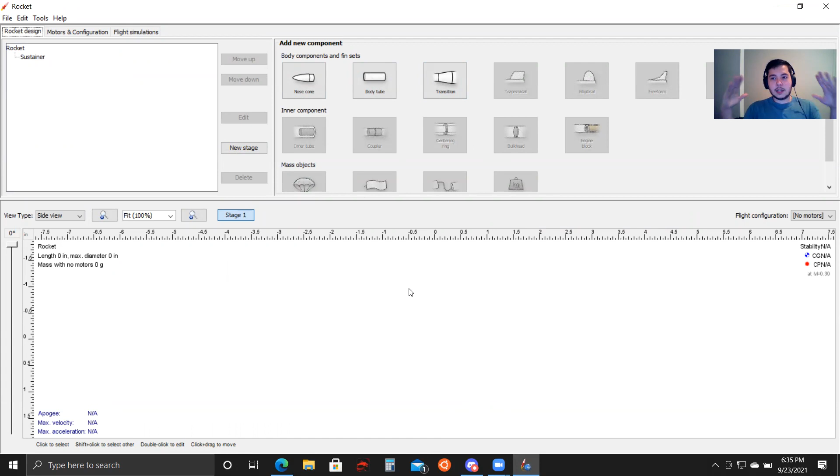So let's get started. First, we start with this blank form here. Just a little synopsis of what's going on here. This top part here, these are all the parts that you can put in. And so you click and it'll put the part down here. This will show you your rocket, kind of like a side view of your rocket. Up here, it says rocket, that's just the name.

And let me see where stability is. Okay, one thing that I want to point out to you guys. Yeah, I'm gonna have to move myself around a lot. Let's do this for now. Okay, so the way that this works is that down here, you'll see a few things. First, on the bottom left, apogee, super important.

The apogee is the highest altitude that your rocket reaches during flight. We're gonna give you guys a particular apogee that you're going to aim for. This is for all challenges from altitude, payload, and lander. So this is how you'll know kind of how far your rocket's going to go.

Of course, in the real world, the atmosphere has various pressures. There could be wind and all these different factors that can ultimately lead your rocket to not really reaching that exact apogee. But this is a pretty good estimation of where your rocket's going to end up.

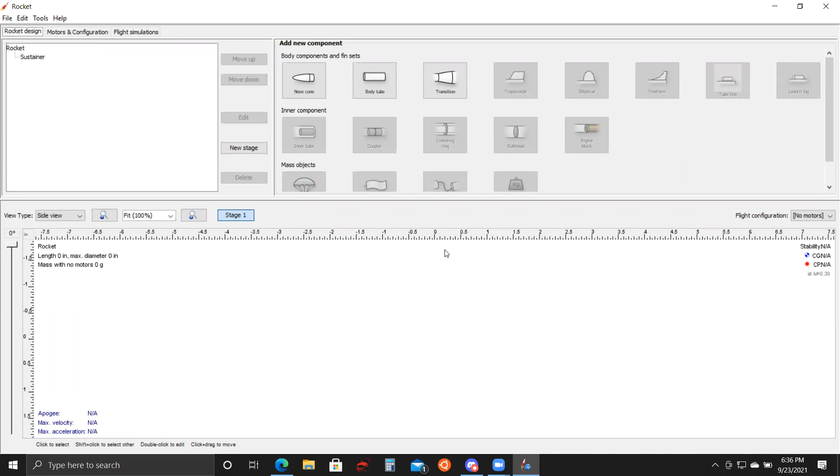The next thing that is super important is this stability to the top right. Last week, we were talking about rocket stability. I was explaining to you guys how it works. And I told you that we like a stability between 2.0 to 2.5 caliber.

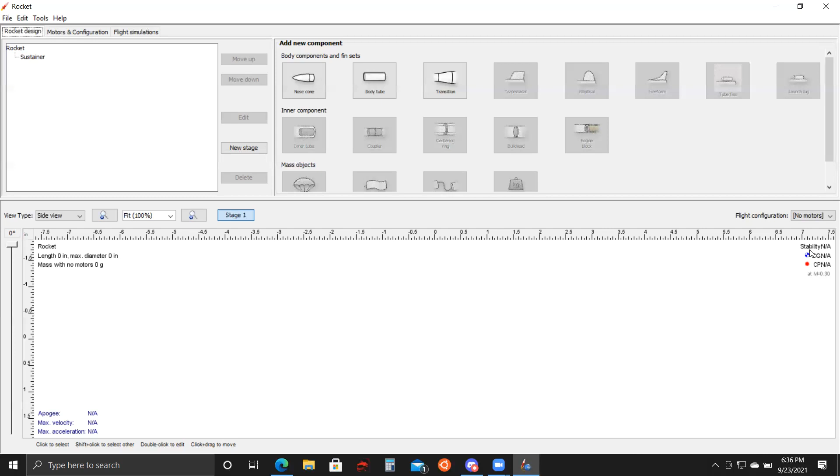This is what I'm talking about from last week. You want the number on the top right here to be from 2 to 2.5. If it is not, I'll show you guys here how to make the adjustments to make it more stable. Other than that, this is the really basic stuff that you need to know. So we can just get started.

Oops, let me show my face again.

Okay, so first we're going to put on the nose cone. So the way that it works, you look here, nose cone, put it down. So whenever you put a part on, it'll put it on the bottom and you'll see this window right up here. You guys see this window, right? This nose cone configuration, component name nose cone.

Just want to make sure that you guys see my whole screen. Yeah. Okay, cool. Chat says yes. Heads up, I'm here. Oh, nice. Hey, Mark. Yeah, no, if you see that I missed anything, Mark, please interject and let me know, hey, you missed something. So you can go from there.

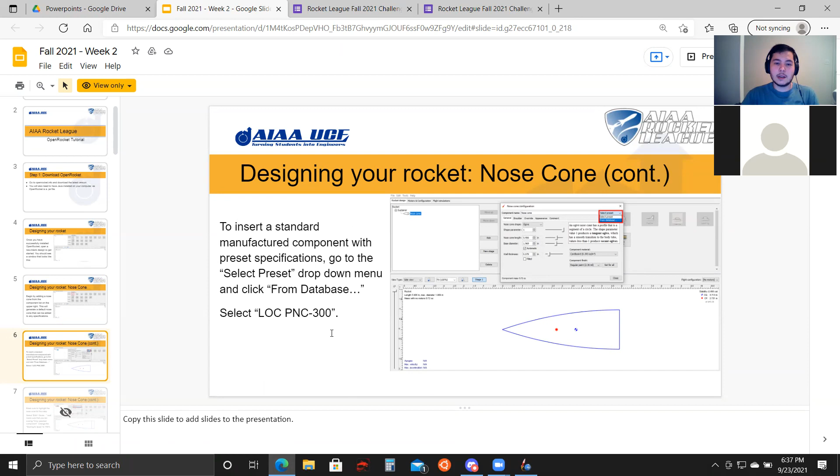All right, so after you put in your nose cone, there's going to be a bunch of different options. What's likely going to happen is you guys are going to be given a preset nose cone. The slides say to do an LOC PNC-300 from the database. So the way that you access all database parts is you look on the top right, select preset, click down from database. You're going to have all these options. What you can do is, it's this very tiny box that says filter by text.

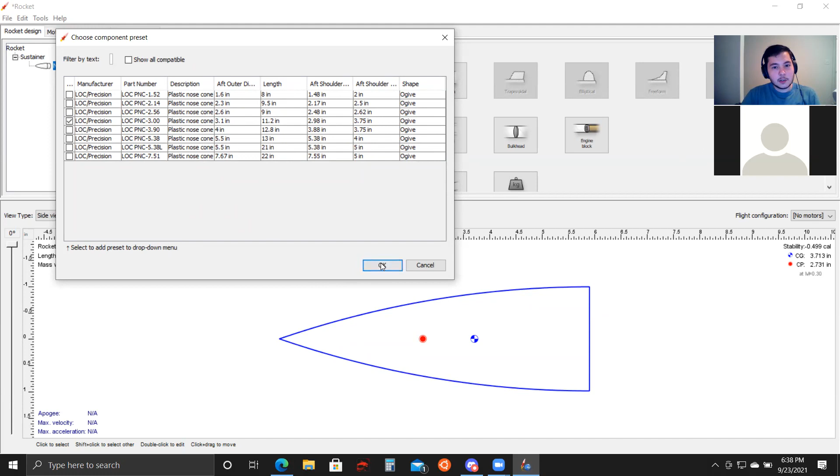If you click and you type LOC, you see how you don't see it up here, but if you click on this little box and you start typing, it'll show everything here. So we're looking for the LOC PNC-300, which should be 3.00, but still, it is this. So you hit the little checkbox, hit OK, and then it does not work. Oh, okay, there. Sorry about that. It puts it here. You click. Hey, look at that. Your nose cone is now put to that preset.

Once we give out the bill of materials, you guys will know exactly if this is the nose cone or if there's a different one you have to select. But I think the LOC PNC 3.00 is the one that we're using. Just a little thing, sometimes teams can design their own nose cones. If you were to 3D print it, you can basically make your own shape, whatever you want. The way that you would do that is if I go select preset again, it's already done that. Let me just quickly delete this nose cone and show you the different options. So here's how you make your own little nose cone.

First, you can do shape. There's a bunch of different ones that you can play around with, like conical is this little triangle shape. Ogive is kind of curved based on a particular formula, ellipsoid, like that. And you can play around with all these. You can play around with the length. For the base diameter, you want it to be 3 inches. Might be 3.1 or something. Basically, you want the diameter of the nose cone here to be the outer diameter of the body tube, just so it sits nice and flush.

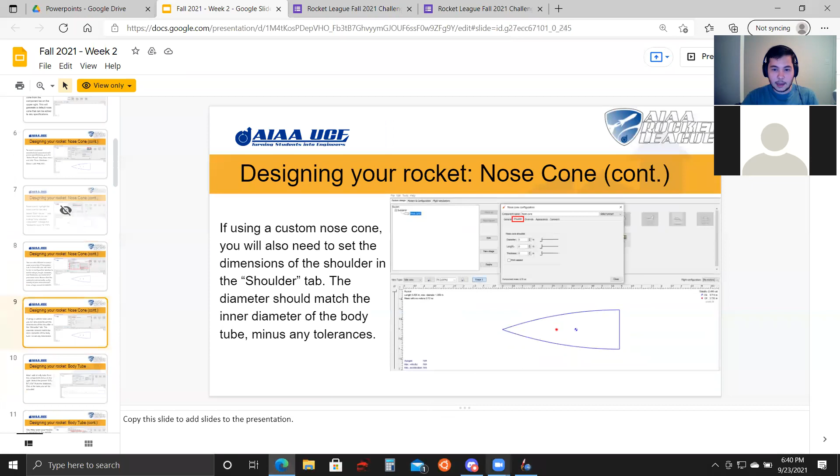Wall thickness, I forget what we set that to. Well, it will be based on the LOC PNC. So wall thickness 0.125 inches. Yeah, so you're going to want to do something like that. Actually, this is quite nice to work off. So just back to this. I'm really sorry for the mess. Nose cone length, play with it. Shape, play with it. Wall thickness 0.125.

Cool. For component material, put plastic, I believe. It should be polystyrene. Oh, polystyrene, my bad. There you go, polystyrene. Basically, the way that you would do your nose cones custom is you would 3D print them. If you go to the TI lab, they have 3D printers, or if you know someone with a 3D printer, you can 3D print your nose cone. I've done it before for my level 1 rocket, and it worked. So you just make a SolidWorks mock-up of your nose cone, and then 3D print it. Another thing that you have to keep in mind is you need to click this shoulder.

What the shoulder of the nose cone is: imagine you have a nose cone, and then under the bottom there's another little piece that fits into the rocket. That's how it secures the nose cone into the rocket. So if we add a nose cone shoulder, let's see here. In essence, you need the diameter to match the inner diameter of the body tube. So we put 3 inches.

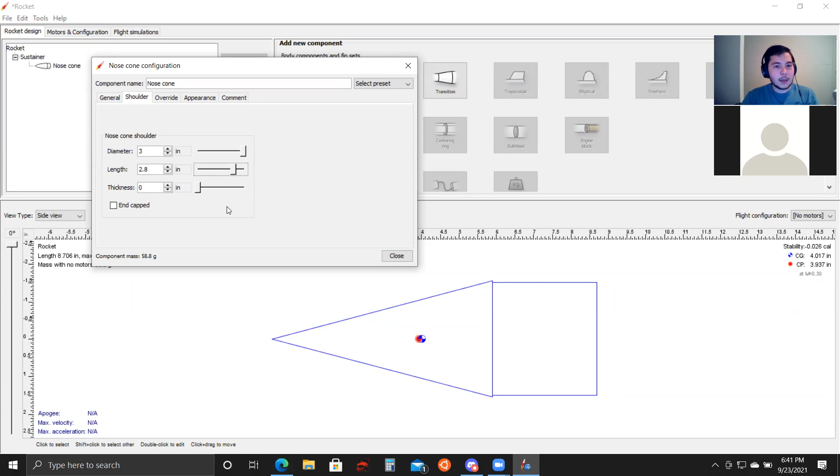We could put a length. Ooh, let's see what a good length looks like. Uh-oh, looks like my nose cone's base diameter is pretty small. There we go. It's going to look something like that. So you could put a length here. I forget what I put my length to. We'll check with the LOC preset later.

And then thickness, you should add the 0.125 as well, just to make sure it has the thickness. And you can kind of get the gist of how you make the nose cone. For the LOC, it is 3.75 inches, so that's about the length of the shoulder that you want. But that's all stuff if you're making your nose cone. If you're not making a nose cone and just using one of ours, just use the preset, and it's a lot easier to do this.

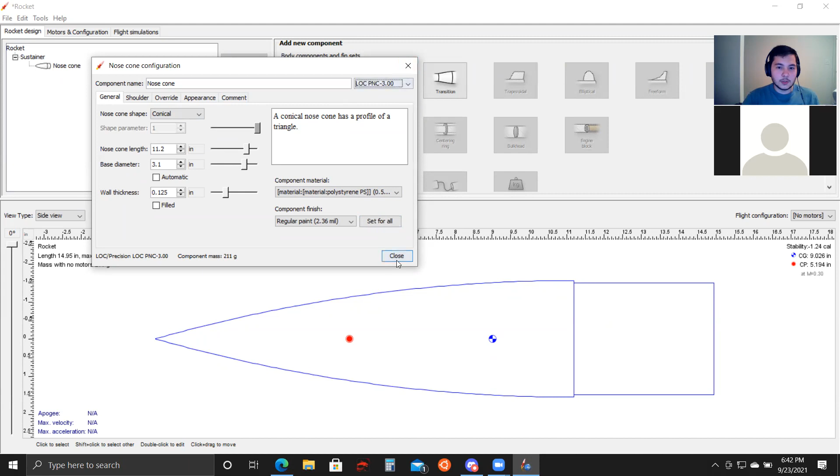I think that's all the parts that I need to talk about for nose cones. Does anyone have questions about nose cones before I move on to body tubes? Cool, I'll move on. All right, so we have a nose cone, but that is only one little piece of the rocket. Now we put in a body tube. Where is it? It's right here. Pow, you add a body tube.

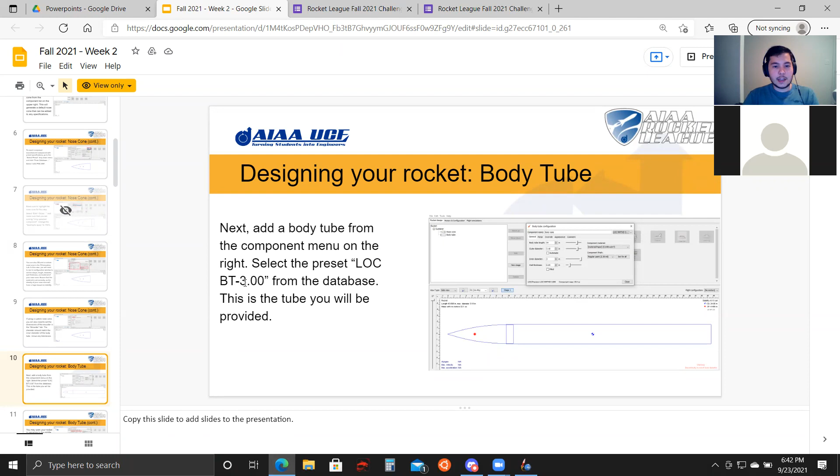For the body tube, you're going to want to use the LOC BT-3.00 from the database. This you want from the database for sure, because those are the body tubes that we give you. So you go LOC, precision BT, this one. Okay, go back, hit it. There you go. Let me put my stuff away so we can see the whole body tube. So now the body tube is like this. This is one long piece.

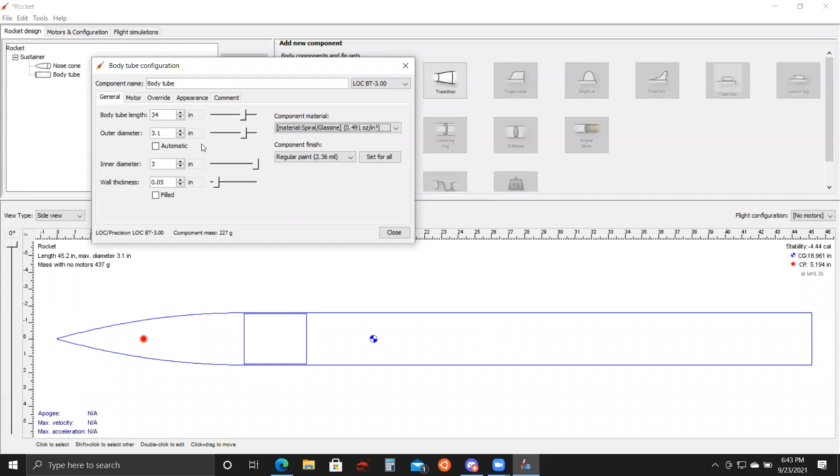If you are doing the lander challenge, leave your body tube like this. You will have just one big solid piece. If you're doing altitude or payload, not lander, you're going to be splitting your body tube in half down the middle. The way that you do that is you take this and change it to half, which is 17 inches, I believe, 34 divided by 2.

Then you're going to close this out, and you can look at the components that you've actually put into your rocket. Hit body tube, Control C, click out, Control V, and you can see that you've made 2 little sections for the body tube. So now you have 2 halves of one bigger body tube.

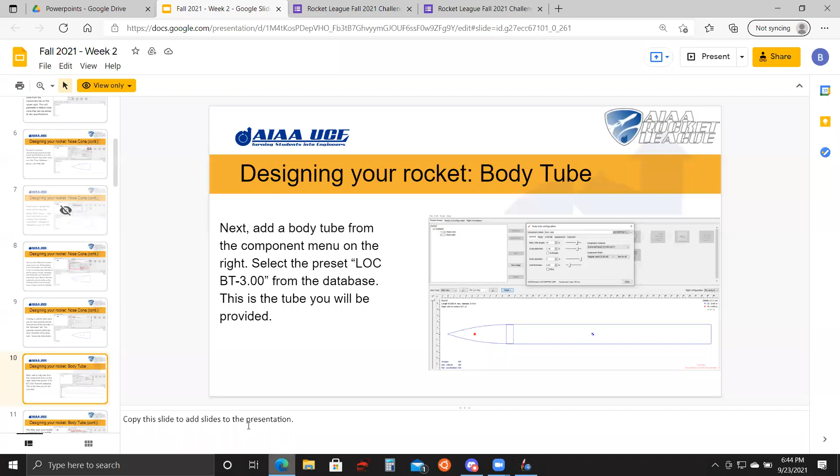When you do this, you're going to have to put something called a coupler. Basically, imagine you have 2 ends of your body tube, but they've got to slide together somehow. So you actually put in a coupler right here. So if we go to the tube coupler, the TC-3.00 preset. So from database, TC-3.0, there you go. It's still the LOC precision.

Click OK. Alrighty, I did this really badly. What I should have done is put it onto the top half of the body tube, but I accidentally put it onto the bottom. If you look here, we have our nose cone. This body tube is the one to the left, and this body tube is the one to the right. So if I click and drag this up, I can put it into that body tube instead. And its length appears to be quite short.

You should select it from your select preset first. Oh, you are right. Okay. There we go. That's a lot better. Thank you, Mark. See, that's why I need people with me.

Okay, so the preset is there. So now we have this long body tube. What you're going to want to do is, you see this plus here? You're going to want to drag it around. You see how it moves the component around in the body tube? You're going to want it so that half of the coupler, about 3 inches, is in there, probably the best. There.

So you see how half the coupler is on the top of the body tube and the other half is on the bottom. The way that translates to real life, you can kind of imagine you have 2 separate pieces and this smaller coupler, and it's flush with the body tubes. It's like fitted perfectly.

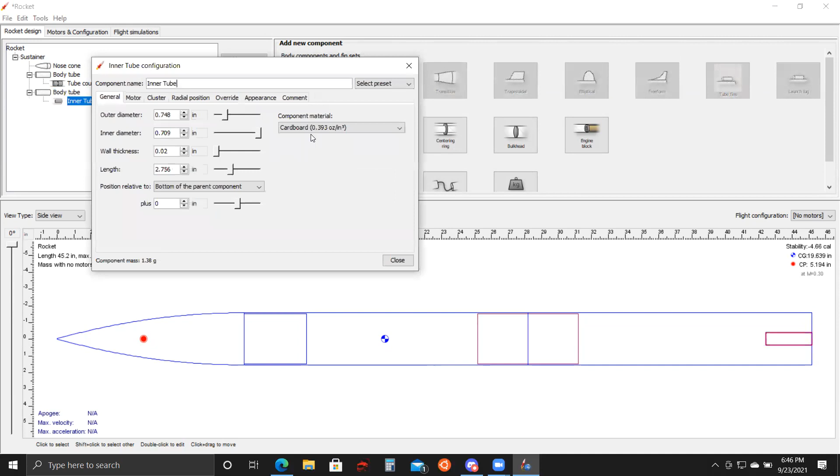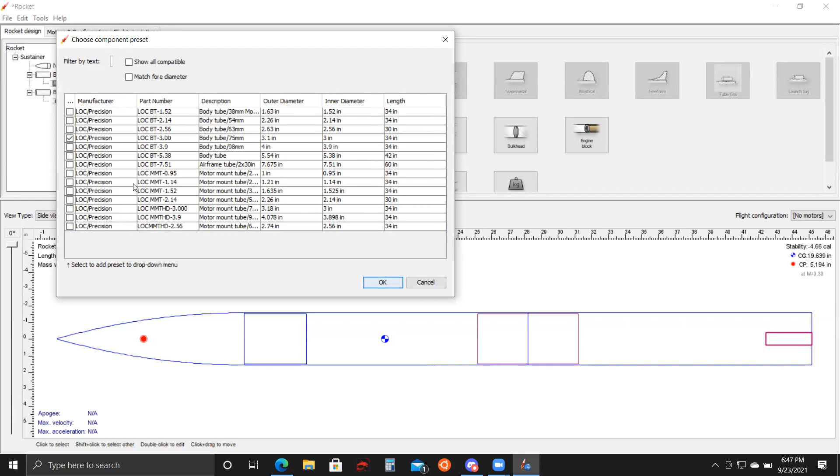Motor tube. This is going to go on the bottom of your rocket here, and this is where the motor goes in. So how does that work? Well, you're going to look for this inner component here for inner tube. You're going to click. The preset is LOC MMT-1.14. So we got preset. I already forgot, LOC MMT. So we click LOC MMT, this one. So we hit OK, select the preset.

That is a long tube. What you're going to do is you're going to take length, and instead of 34, change to 3.5 inches. There you go. That looks better. So just change that length down to 3.5 inches. That's what it shows on the slide. And then you're gonna wanna add a little bit of overhang. So like 0.25. Let me see what the slide says. Oh yeah, there you go, 0.25.

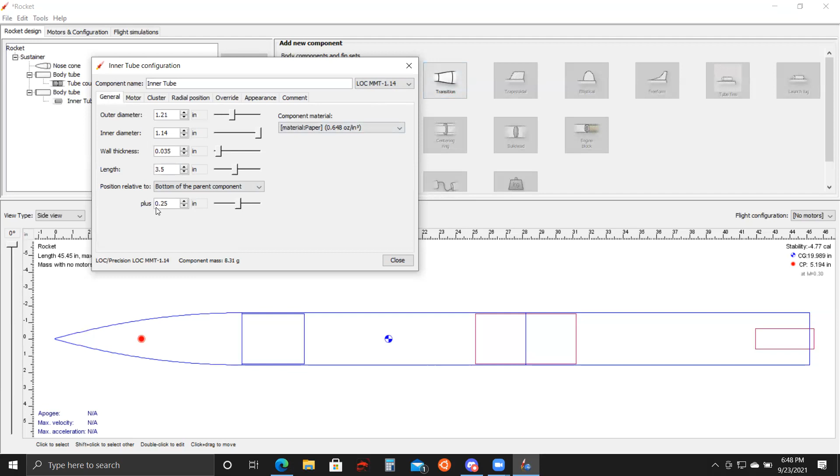The reason why you want to do this is because when you have the motor inside the tube, there's going to be a little part that kind of hangs out. So by doing this, you're going to position the motor tube just a little bit further down to help simulate the actual rocket. So that's it. You just select the preset, change the length to 3.5, give it this little overhang here, and you're done with your motor tube. I trust that was fairly simple.

Now for centering rings. So the centering rings go around the motor tube. The centering rings attach to the outside of the motor tube, but to the inside of the body tube, and keep your motor centered. That's why they're called centering rings. So the way that you do that is you're going to go up here to the inner tube, and then you're going to click here, centering ring.

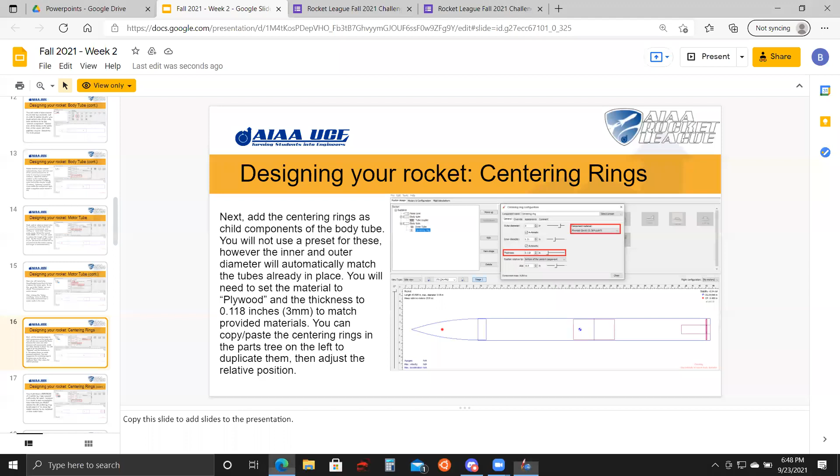And then for the centering ring, let's see here. Is there a preset here? I actually forget. No, it doesn't appear. Okay, so for the material, you're going to want to have plywood. There we go, plywood. The thickness is going to be 1/8 inch. The outer diameter is going to be...

You put your centering ring inside your inner tube. Oh, no wonder it's not working. Put it in the body tube. My bad. There we go. It automatically measures it. Sorry, there's some things that I forget. But anyways, if you put it in the body tube and not in the motor tube, it will automatically measure how big the centering ring has to be to fit inside the rocket. So you can see here, outer diameter is 3, inner diameter is 1.21 inches.

So that's good. You're not going to want just one centering ring. You're going to want multiple to make sure that the motor tube is really secured. So the way that you can do that is we close, Control-C, and you just go Control-V, Control-V.

So now we have 3 centering rings, but they're all on top of each other. That's not really what you want. You're going to want to take some of these centering rings and move them around, right? With this nice slider here, or you can even put specific inputs. You can say that's actually a really nice place for one of the centering rings. And then, oops, not that one. For the second centering ring, you can kind of put it a little bit closer like that.

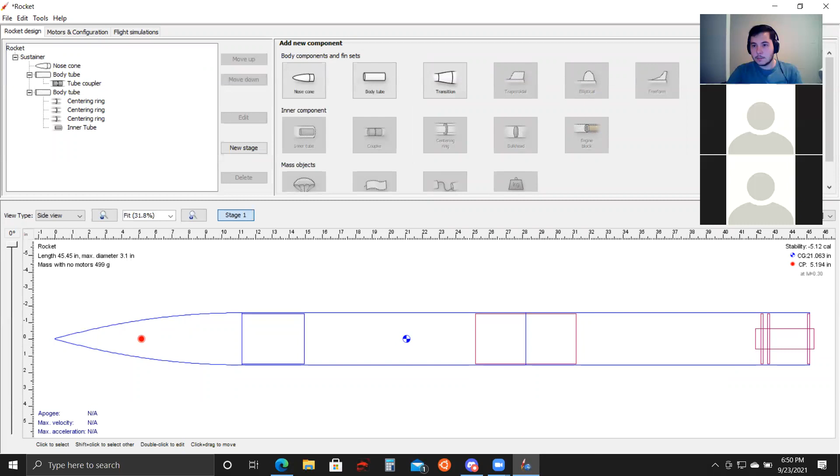Your mic is hot. I'm going to mute you.

Okay, cool. Anyways, you're going to want your centering rings kind of like in this configuration. You can even take this bottom one and add just a little bit. What's the increment? I would honestly say minus 0.4 here. 0.25, but you get the idea. You can kind of play around. You see it, put the centering rings in this sort of configuration. That way the motor tube will be very secure.

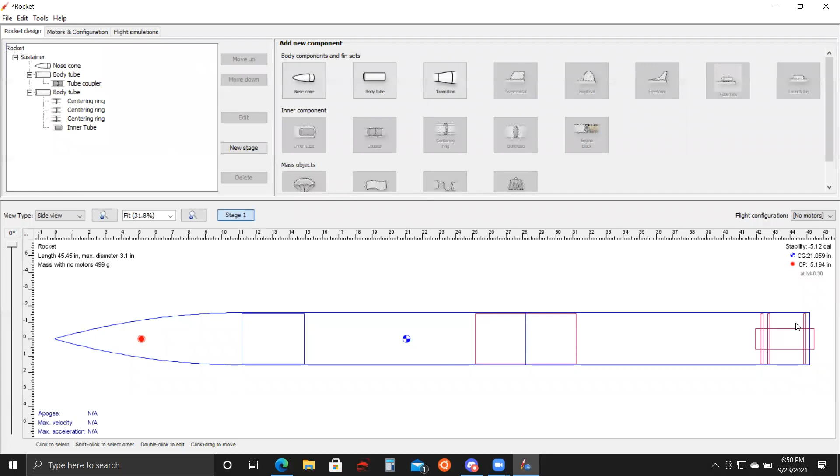But it's very important that you leave a kind of larger gap here, because when we start designing the fins, I'm going to put the fin tabs I was talking about last week in that space. So that's how it's going to attach to the rocket. But that's it for centering rings. You put down 3 or so. Make sure that it automatically fits into the rocket and kind of position them in this sort of shape.

Alrighty, if nobody has questions for the centering rings, I'm going to move on to the next part, which is fins. Hey, look at that. Now that we're talking about fins. Alrighty, so here's how fin design works. This will be a bigger part of how you design your rocket. Everything so far has been very standardized: nose cone a certain way, body tube a certain way, motor tube, centering rings, all of that is already rigid. It's already laid out for you.

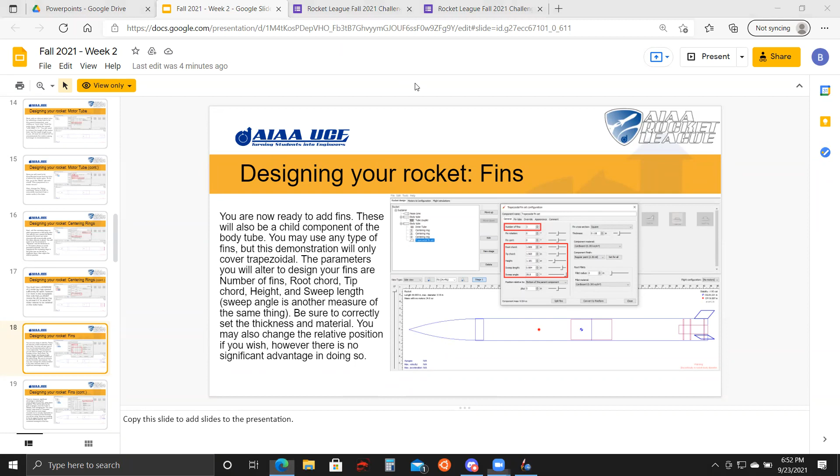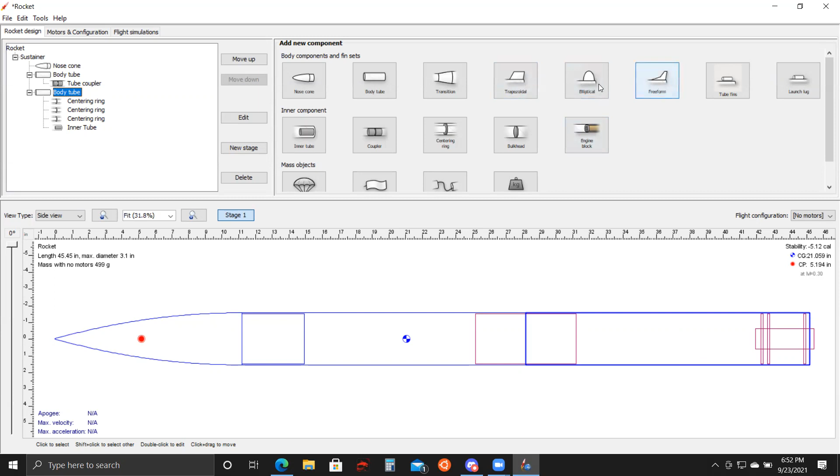But anyways, let's talk about fins. So fins are completely up to you. Last week we kind of talked about fins and how you have to have the root chord longer than the tip chord, and all that stuff. It's gonna apply now. So the way that you put fins in is you're gonna look up here, and you can see 3 different options for fins. Let's go with trapezoidal first, kind of easier. So you click trapezoidal, and you look, oh wow, fins.

So the way that this is going to work is there's a bunch of parameters I'm going to tell you about. Number of fins. This is how many fins your rocket has. You want 3 or 4. Don't go to 2, definitely not 2. Your rocket will not be stable. More than 4 is unnecessary. Also, don't do that. 4 is great for stability. 3 is more efficient, but can be less stable. Not that it's necessarily a horrible thing, but it's a little more stable with 4.

Fin rotation. This doesn't matter. It just kind of rotates it. If you imagine your body tube, fin rotation just kind of rotates it around like this. Don't worry about that. It doesn't help you. Fin cant. Do not touch that. What the fin cant does, I'll show you, is you see how it kind of makes it rotate like this?

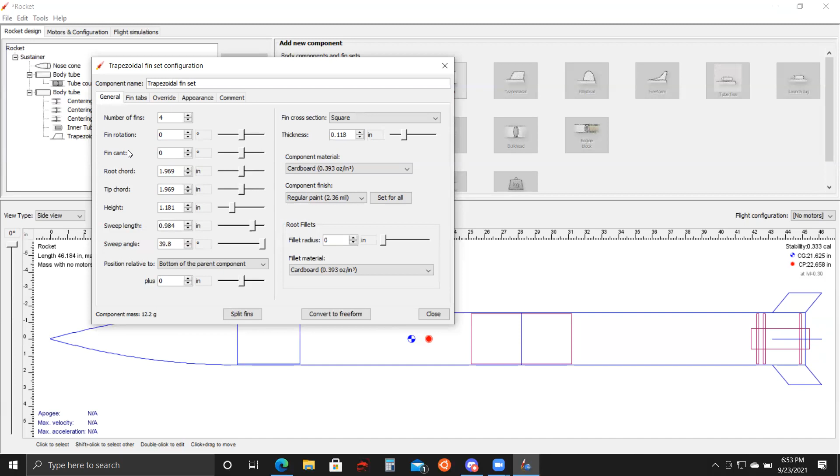What's gonna happen when you cant your fins is your rocket is gonna have these sideways fins, and as it flies, it's just gonna start spinning. Please don't do that. If you cant your fins, you're not flying your rocket. So do not touch fin cant. We like to say you can't cant your fins. So yeah, bad, very bad.

Root chord, very important. This is how big the bottom of your fin is. So you can see as I edit it, look, the bottom of the rocket's fins are increasing. So I would say that you kind of want it to be a little bit bigger. I like the 3.5 inches, something a little bit bigger.

Yeah, so the root chord, you could play around with it. Have it slightly big, though like 3 to 3.5-ish inches is nice. The tip chord, this is gonna edit the top, if you can see there. Make sure that your tip chord is never larger than your root chord, otherwise your rocket will be in a very rough spot. But you can also edit this to your liking.

And one thing that I want to point out, as I'm playing around with these parameters, notice how the stability is changing, right? As I do things, stability is changing. So as you're designing your fins, you're going to notice that, hey, when I do this, my stability is going down, but when I do this, it goes up, okay? And really depending on how you decide to design your fins, your stability is going to start shifting around.

For the fin height, this is how, well, high the fins are. Make sure that they're not too crazy high, otherwise, again, they'll be prone to breaking. And it will not let you know if it's too high or not. And you'll notice, hey, look, my stability is actually at 2.56, so I'm actually a little too stable. Don't worry, that will be ruined once we put the motor in. But just understand that the height will increase your stability because bigger fins means that the center of pressure here, the CP, this little red one, is going to go further down and increase the distance.

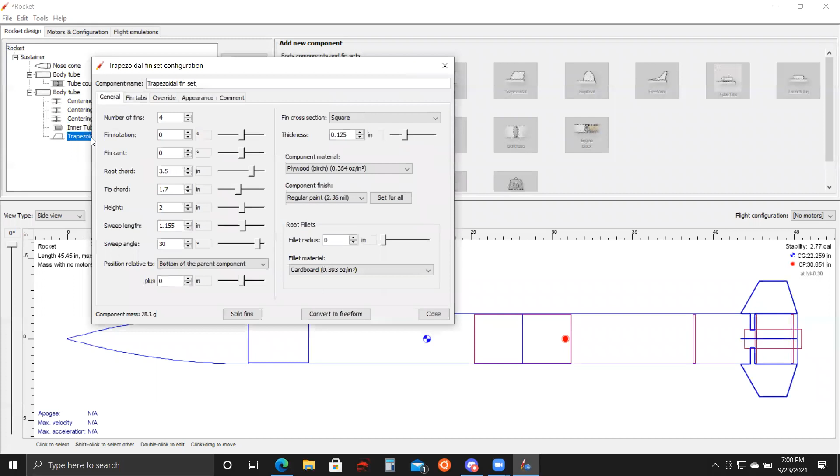You would have to take the centering ring out of the picture. Actually, I wonder if that'll make it work. But yeah, you might have to wrestle with OpenRocket. It's an old program, so you got to give it some time. Anyways, that's the gist of fin tabs, if you can make it work. If not, then as Mark said, outer diameter minus the size of the motor tube should get you there. Does anyone have questions for fins? Because I think that does the trapezoidal fin set quite nicely.

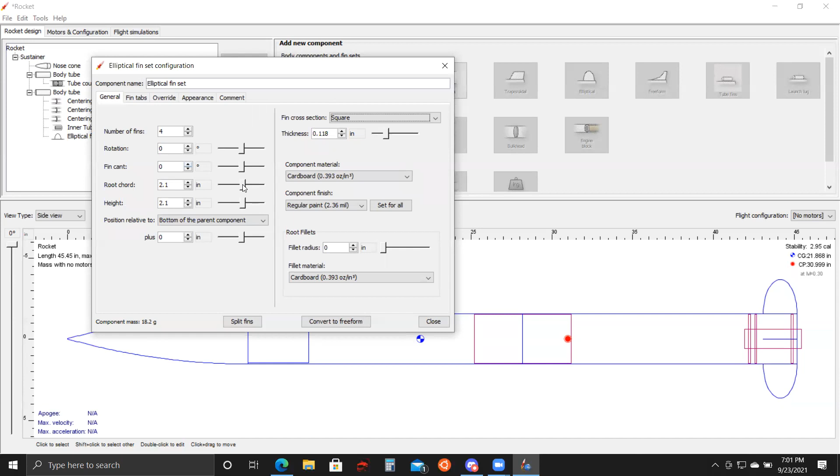If not, then I'll just quickly go over the elliptical fins. There's actually nothing wrong with using elliptical fins. You can see that there's very similar parameters: number of fins, rotation, cant, don't do that, root chord, height, and you can play around with this. And then fin tabs, hold on. Let me make the root chord like that. Fin tabs, calculate automatically. No, okay. Something's wrong with my rocket that OpenRocket doesn't like. Hopefully for you guys, this will work.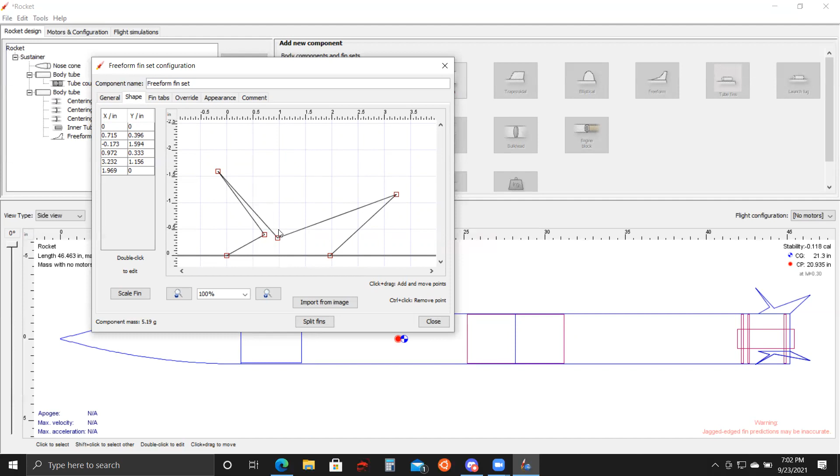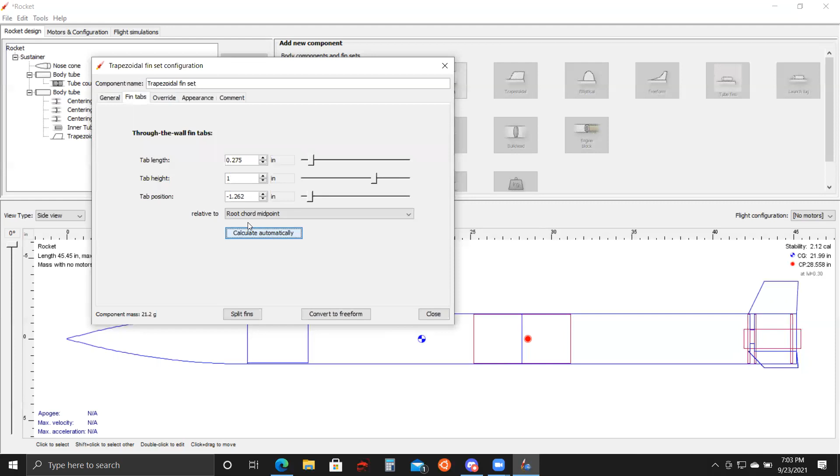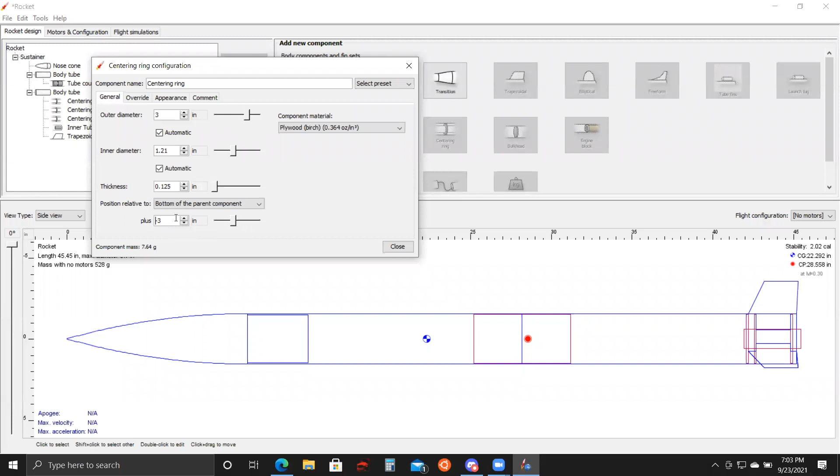So what I'm gonna do now is just really quickly draft up random fins, just to have some stability. 1.9, 2.13. Okay, cool. That looks nice. The fin tabs don't feel like calculating right. Let me just add an inch or so. I do want to have enough of a mass component on the bottom just to have accurate stability. Alrighty, so that should explain most of what you need to know for fins. Keep in mind, you can customize your fins as you'd like, whatever shape comes to your heart, as long as it makes sense to us.

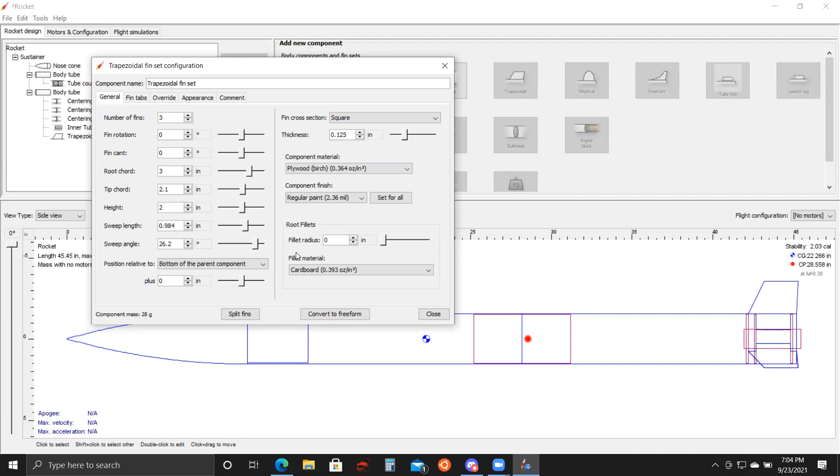So yeah, let me change this out to apply an 1/8 inch. Okay, guys, if there's no questions for fins, then I will move on to the next part of the PowerPoint. Ooh, lots for fins. Do not cant your fins, fin tabs, rail buttons.

Sure, let's do that. So what rail buttons are: you have your rocket, but you need it to be upright on the launch pad. So the way that it works is that there's going to be this long rail, and you're going to be able to put it onto that rail. And the way they put it on is with, well, rail buttons. So the way that you add the rail buttons is you might actually have to hit launch lugs. Yeah, it's the launch lug part, but we will have the specifications for your rail buttons.

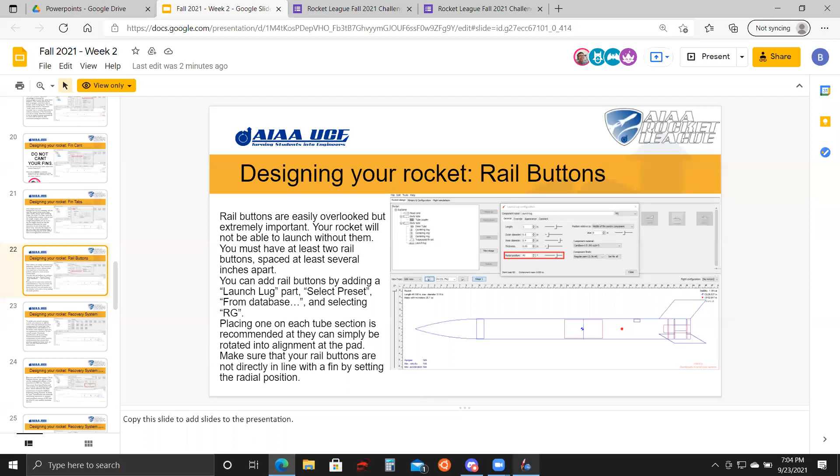RG. Okay, so you go to the database, type in RG. Hey, look at that, giant leap. Hit OK. Then you go to the preset. Nice. The component should not be cardboard. Yeah, Mark. It should be something different. Polycarbonate. Just use a random plastic like polystyrene. Polystyrene, sure. Yeah, we'll have a very detailed bill of materials later. This is just sort of a rough overview of how to do OpenRocket.

Menus you close, and we're going to want 2 launch lugs. One is going to be on the top half of the rocket, and we're going to have the launch lug length. Radial position? No, I don't really need that. Oh, there it is. 0 degrees. You're going to want this kind of higher up on the rocket. And you're going to take this launch lug, copy it, and then paste it into this body tube. You're going to want this one kind of down by your fins. But actually what I'm doing now is bad because my fins are going to be intersecting with the rail buttons.

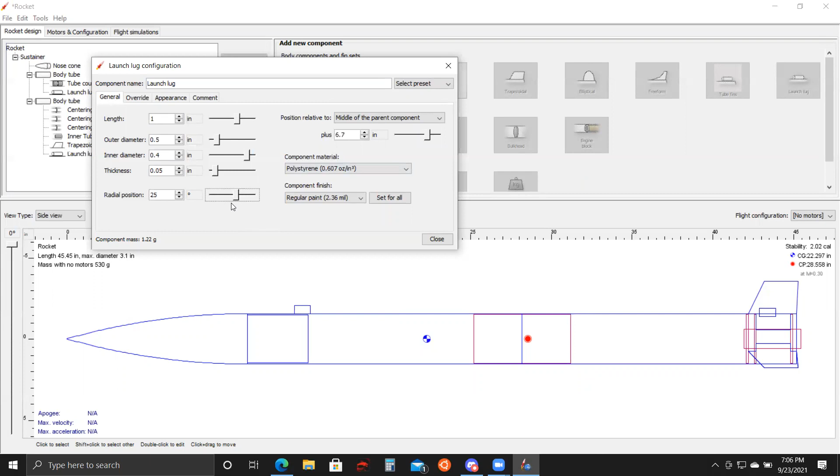So what I want to do is take this radial position and put it with an offset. The way that you can tell if your rail buttons are okay is if you go to view type, you can see a back view. So you can see that I have 2 rail buttons. The top one here is still in line, and I put it to 25-ish. So there you go, 25 degrees. So you can see from the back view, here are my fins, and here are my launch lugs. The fins are no longer intersecting with the launch lugs.

Before at 0 degrees, oops, you see how they're kind of intersecting with each other? That's bad. That is breaking laws of physics. So make sure that you give it some offset compared to the fins, just so it doesn't do that. And I would say actually put more like at least 35 or 40 degrees, just to really make sure that it'll fit on the rail. And we'll do that for the top one too. Also make sure that they're aligned here.

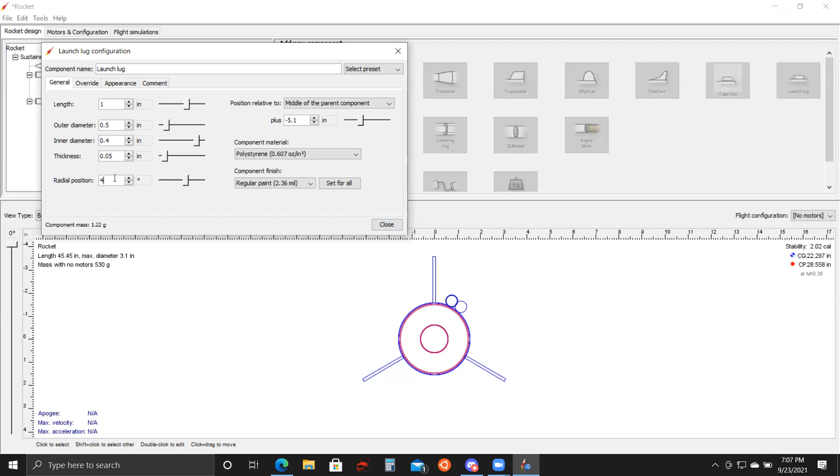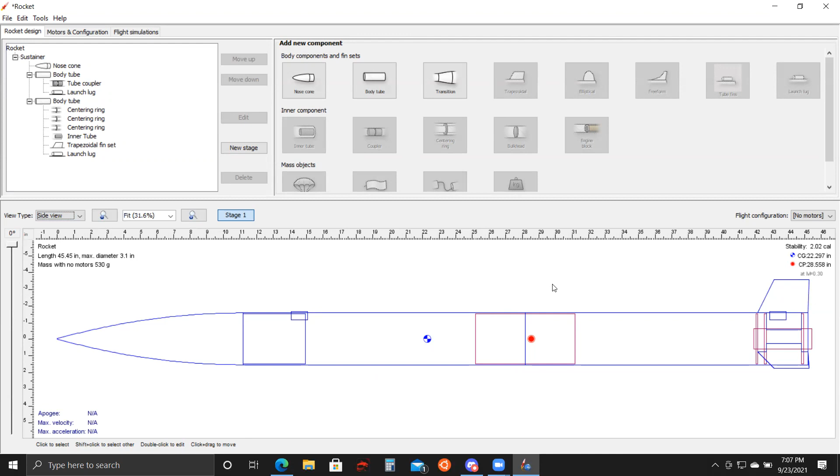Actually, for split body tubes, that being altitude and payload, don't worry about this. Basically, if your launch lugs are misaligned, you can twist the body tube around. So don't worry about lining up. If you're lander and you have a single body tube, make sure that it is aligned. We'll talk more about that during building, but really make sure that it's aligned, because if they are not aligned, they will never be. So yeah, that's it for the rail buttons. This one's a very simple part.

Recovery. Okay, recovery is going to be a little more involved, so we're going to be sitting here for a while. All right, so for the recovery system, you need to add a few things. First, you're going to want to add the shock cord. So if you look here, you can go on this bottom body tube here. If you look here on the mass object, shock cord. Nice. Is there a preset component? Quarter flat elastic. Elastic cord round, elastic cord flat 6 millimeters. That one. Flat 6 mil. Okay, so it's this one here.

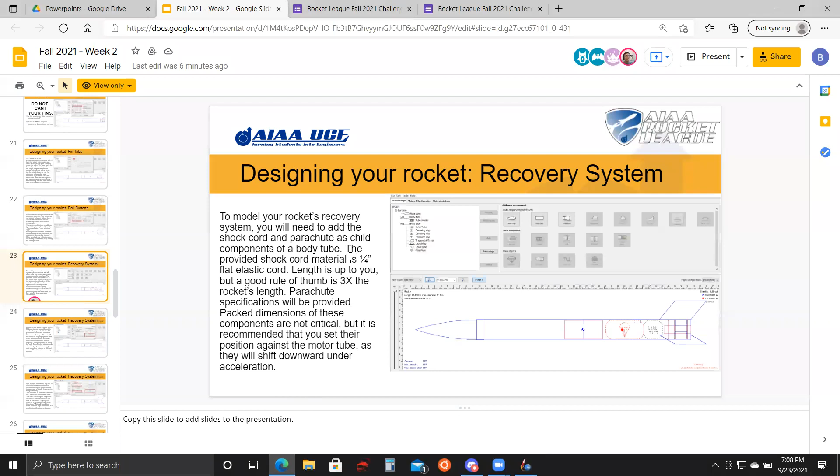And then the packed length, what do we put as the packed length? Well, the shock cord length should be at least 3 times the length of the body tube. So if the body tube is 34 inches, let me just pull out my calculator real quick. 34 times 3 is 102 inches. This is a really good standard for how long your shock cord is going to be, because you need plenty of space so that when the ejection charge goes off, there's enough cord to absorb the force caused by that.

We're gonna give them 84 inches of elastic shock cord. That's right. And then that's fine. It's less than the 3 times the length of the body tube, but that's still good because it usually works. Sounds good. And then for pack length, we're gonna want to increase it, so you can see how the length increases. What do we put down as the pack length?

Oops. Yeah. Well, what's important is that you're gonna want your shock cord, if you notice here, more towards the bottom. Where the actual thing goes isn't as important. Something like 5.5 inches. Pack diameter can be a little bit bigger, as shown in the slide here. Actually, no, it's a little bit smaller. But in essence, what you're doing here is assuming that the majority of the elastic cord is going to be sitting on the bottom of the rocket.

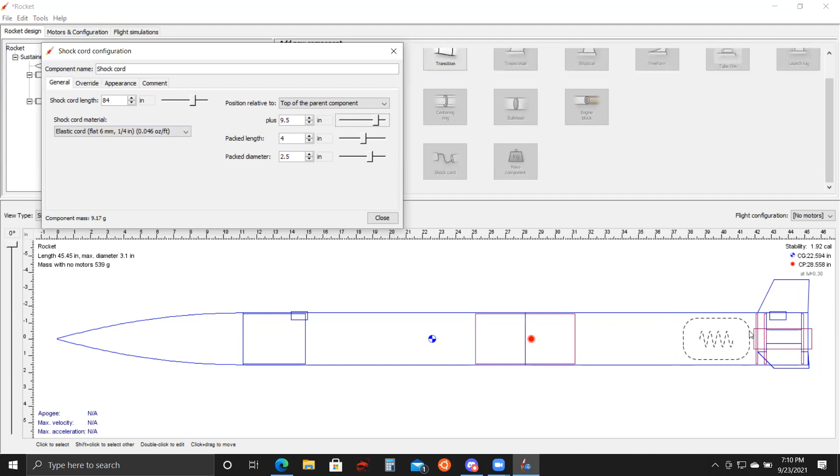And the reason why you do that is because when the rocket is standing upright and being launched, most of the cord is going to be sitting on the bottom, right? If you are altitude or payload, you're going to have a bulkhead, which I'll put in later, which you'll attach your shock cord to. So from here to here, having this 84-inch shock cord and a less than 17-inch space, most of it is staying down here. So it's good to assume that almost all of it is sitting on the bottom. So that is it for the shock cord, or at least I hope it is.

Now let's talk about parachutes. This is going to be a little more involved. So first we're going to explain how we're going to do this. Last week I talked about dual deployment, where first your rocket is going to have the ejection charge go off. It's going to split apart, but the parachute will not be allowed to open because of a chute release. It's going to hold the parachute closed, and then once it falls to 400 to 500 feet-ish, maybe even 300, depending on what we choose, that chute release will open up and allow the parachute to open.

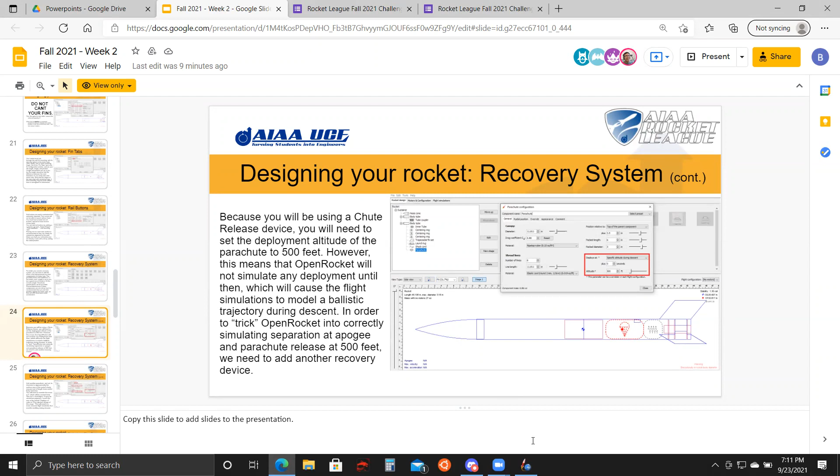But we have to basically trick OpenRocket into believing that the dual deployment happens by having one actual parachute that deploys at 500 feet or so, and then having a fake parachute that opens up earlier in the flight. So I'll explain how that works. So let's put in a parachute, okay? The parachute is down here. If we don't have a preset yet, then we'll give you guys a preset later. But don't worry too much about this. We'll give you the details about the parachute later on.

Let me just make the pack diameter bigger, pack length bigger. Push it down here. You can even have it overlapping with the elastic cord a little bit. This is no big deal. Number of lines more like 8. Line length of 12 is fine. In essence, you're going to have this one parachute. And the super important part that you have to pay attention to is deploys at: not apogee. You're going to have a specific altitude during descent, and let's put it at 400 feet for this simulation.

So we have a parachute. It is real. It's going to deploy at 400 feet. Okay. And depending on what we tell you guys for this, it'll change how the parachute works. But those details will be released as you're designing the rocket.

Someone's mic is on. Lucas, I'm gonna mute you. Okay.

So this is important. Make sure that you do this. Now we're gonna put in the second dummy parachute that I was talking about. The way that you do it: parachute again, but this time diameter 0. You want 0, 0, 0. Actually, you can have a little bit, but you don't want this thing to really exist. And part of that is you're going to go to override mass, 0 grams.

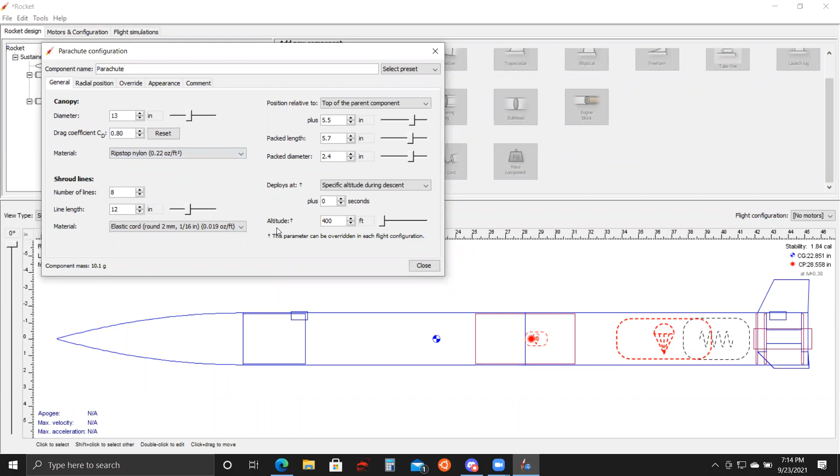Then at 400 feet, as I put here, this parachute is going to go off, and it's the real parachute. And then OpenRocket will go, okay, real parachute going off at 400 feet. Once the rocket is simulated to have gotten there, it opens up, parachute goes, and your rocket lands safely. And I'll show you that once we pull up the simulation part. So that's why we need both dummy parachute and real parachute, and make sure that you put that there to get accurate simulations.

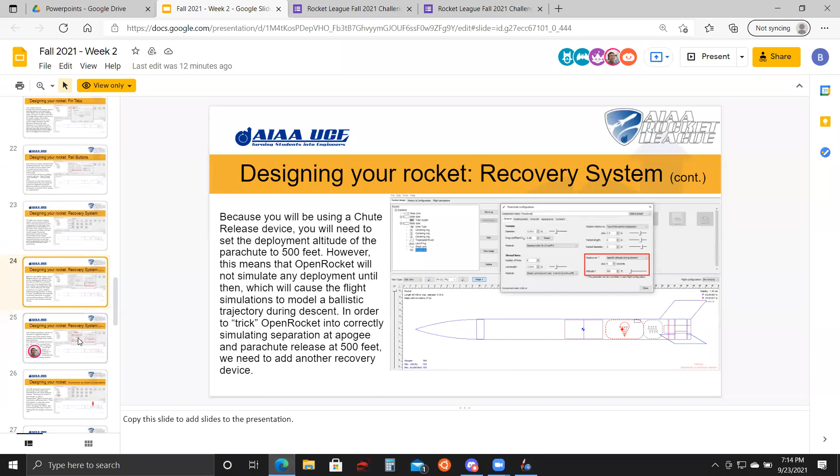Does that make sense? I know that it's weird. I know it's definitely weird, but as long as you follow the slides and you do everything right, you'll be okay.

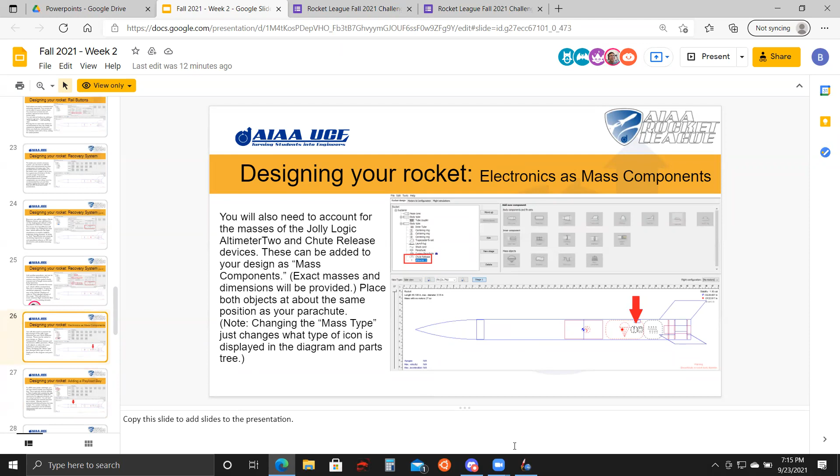Next, design a rocket for electronics as mass components. For electronics, it's pretty simple. All you really need to do is go to mass component, just like this. You can even put mass type altimeter. For the masses, I can't remember them off the top of my head, but it's going to be a very small mass. How massive do you think, Mark? I forget from the bill of materials. I'm sorry, there's so much to remember. In the bill of materials, mass of the altimeter? 0.35 ounces, or in metric, 9.9 grams. Okay, 9.9 grams. All right, so 9.9 grams, and you'll get the bill of materials.

So this will be quite simple. And then just stick this at the bottom, with the shock cord here. Because all these things will be attached to the shock cord and it'll all be sitting on the bottom of the rocket, you can easily assume it'll be sitting on the bottom. And then from there, you don't need to worry about this. The important part is that you have this mass component and that the mass is correct. And if there's any other electronic parts that we include, just make sure that you include them and shove them on the bottom of the rocket. Okay, so that encompasses the main mass components for electronics.

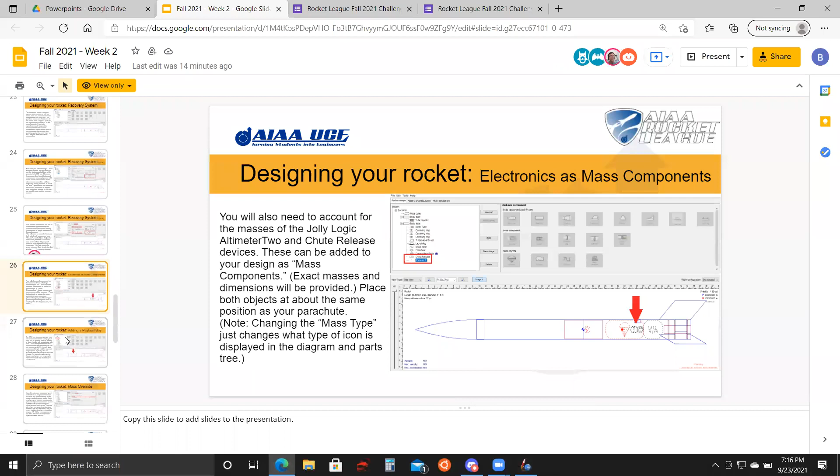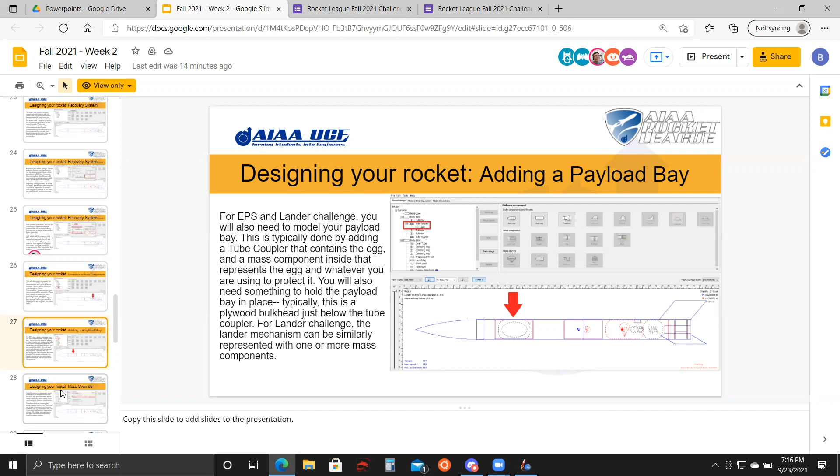So from there, we can move on to payload. If you plan on doing altitude, don't worry about this. If you plan on doing the payload or lander challenge, pay attention, please, because you will need to know this. So when you're doing your payload challenge, you're going to want to do a couple of things. Your payload bay is going to be a coupler with mass inside. So take a coupler, the preset that we gave you, and put it up plus some amount. Let's say here. So you're going to have your coupler, and inside you're going to have the egg.

So what am I going to do? Well, I'm going to go into this tube coupler and add a mass component. And I can even put payload right there. So you're going to want to put the average mass of an egg. Let me Google that real quick. And this is a good assumption to make. What is the average mass of an egg? 50 to 70 grams. Let's do the upper limit of 70 grams.

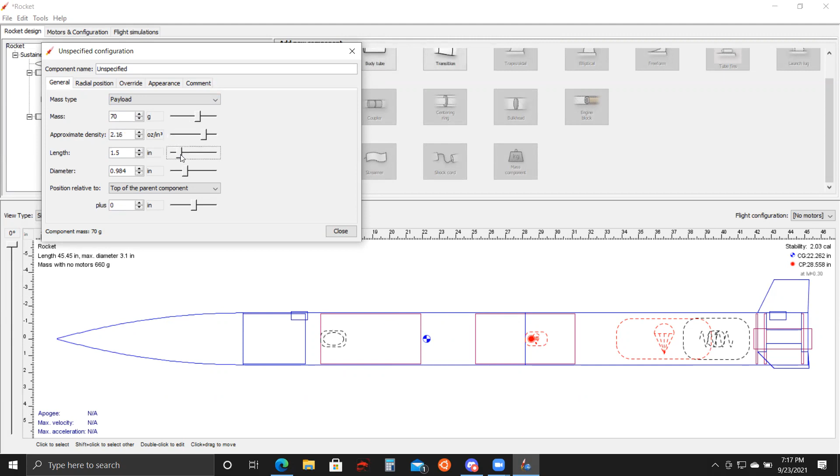And you're going to want the length. If you want, have your length and diameter be the entire payload bay. The reason why is because not only do you have the egg inside, but you're going to have protective material all throughout. It could be packaging peanuts, plastic straws. I don't know. You guys decide how you're going to do your payload bay, however you feel is best. And that's the important part for this.

Now, one thing that I'm surprised hasn't been mentioned is bulkheads, because you're going to surround your payload bay with 2 bulkheads. So I'm just going to explain it to you guys now. How you do bulkheads is this. You press bulkhead, and it's going to automatically calculate here. Make sure that it is plywood, 1/8 inch.

And then you can just kind of fit it ish. It's gonna take some fiddling. Oops. 5.7. No, that was bad. I need 6.1 inches. Kind of like that, 6.2 maybe, but you can see how it kind of fits on like that. Then you could take that bulkhead, Control-C, paste it back in, and then move it to the top.

So you see how you have these 2 bulkheads kind of acting as like caps on your payload bay. 12.3 will work best. There you go. So there you go. That's a payload bay. That's what it looks like.

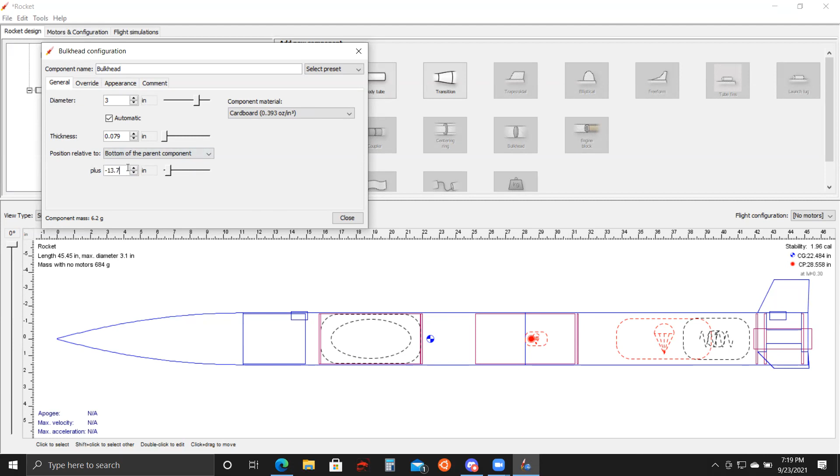And also for the bottom of the rocket, just really quick and on a tangent, you're going to want to put a bulkhead here. You're going to want to stick it kind of like on the bottom of this coupler here, because that's where you will attach your shock cord and all onto this bulkhead. So I need 13.7. Nope. 14 inches. There we go. Something like this. So that's how you put your bulkheads in. And this is a payload bay for the payload challenge.

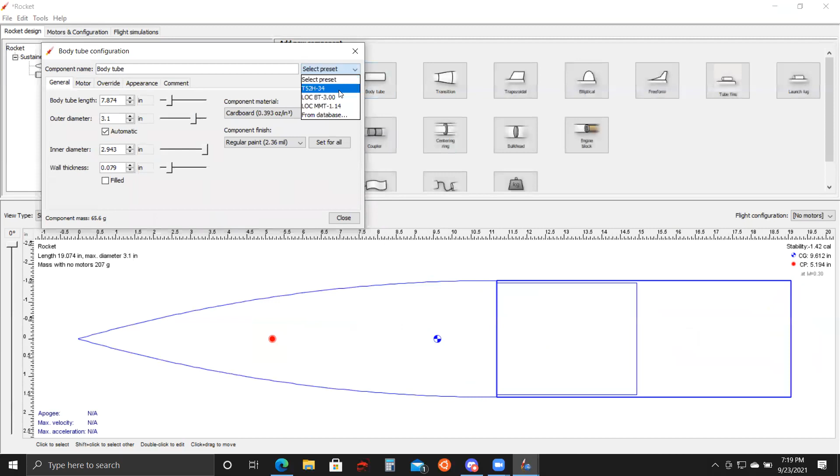Now, if you are a lander, things are going to work kind of differently. Let's go over that now. I'm going to have to make some adjustments. Actually, let me file new. Okay. Let me just really quickly make a super rough draft of this. I'm not going to include the fins and all just because we don't need to. But you'll imagine all the stuff that we have for the previous rocket, so the fins and all, will be there if you're in the lander challenge.

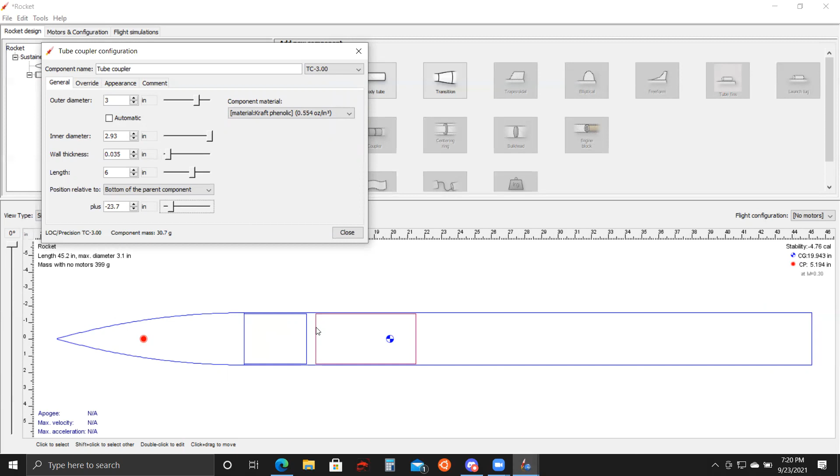What I want to demonstrate is how you're going to be putting your lander inside of your rocket. So what's this going to look like? Well, you're still going to have a coupler as the base. And you're going to put it kind of up here. Make sure that there's enough space, by the way, for both payload and lander. I forgot to mention. Make sure that the shoulder comfortably fits above whatever you're putting in your rocket. If you don't, nothing will fit, and it will be sad. So make sure that your shoulder has plenty of space before you hit this.

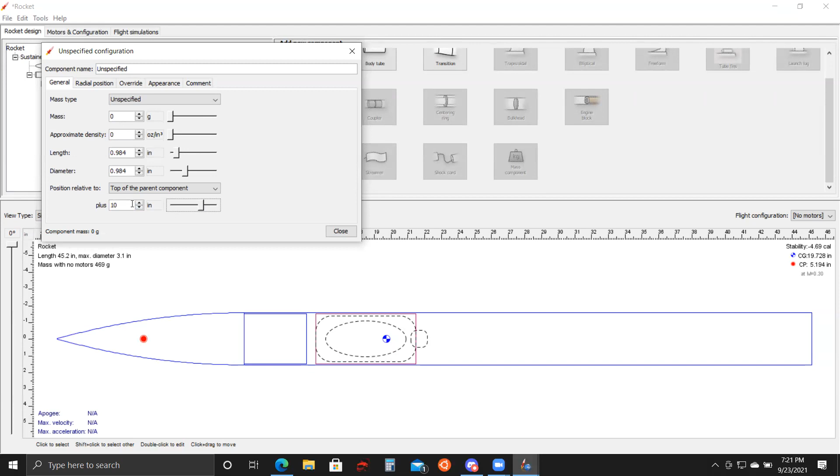And then inside of the tube coupler, you're going to have some mass. Let me make it 70 grams again, because that's what I decided to do. It's a payload. Make it flush. What we're going to do is put some more mass kind of on the bottom. The way that you configure this is going to be kind of weird, but in essence, not only do you have the coupler, but you're going to have legs and stuff on the bottom of your lander. So you're going to want to make sure that you have that mass accounted for, at least somewhat.

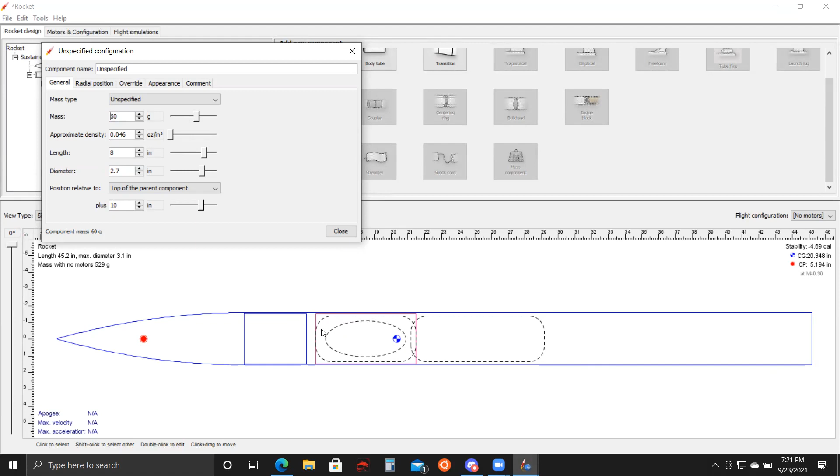Let's say I make a mass component, kind of like this, right? I assume that this area is kind of my legs in a way. And then the mass, if I'm using wood, let's say it's another 60 grams, whatever. So this is going to be basically how big your lander is going to be. So you're going to have your lander inside your rocket, but the ejection charge has to push the lander out of the rocket plus the nose cone. So the way that you're going to,

before I go to that, you need to make sure that your lander stays towards the top of the rocket during flight. Reason being, if you don't have a way to secure the lander in this particular spot up here, although it might be hard to fit in using your hand, once the motor goes off, that force will shove your lander right to the bottom of your rocket. And I've heard horror stories of that happening, and the rocket goes from stable to unstable on launch.

And that is rough. The reason why it goes unstable is if you take that giant mass component and shove it to the bottom of the rocket, suddenly your center of gravity just plummets down. And then you don't have enough stability to have your rocket fly straight. That's from what I talked about last week: if it's imbalanced, you generate a force, then it comes back. The magnitude of the moment depends on the distance and the magnitude of the aerodynamic force down here.

Bring the distance down, the moment comes down, and now your rocket is not stable. So the way that you secure the lander onto a particular position is you actually take a centering ring. And the reason why we want a centering ring instead of a bulkhead is because you want a hole where the gases from the ejection charge can push the lander and nose cone out, but still have that centering ring prevent the lander from going down.

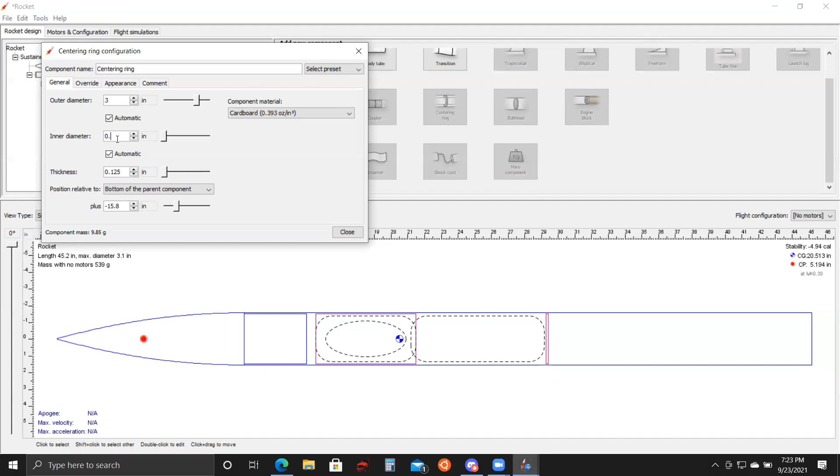And the way that this centering ring will go is you'll have it with a lesser thickness. Then you wouldn't use the normal 0.1 or whatever. Oh, sorry, not the thickness. It's inner diameter. My bad, guys. Inner diameter. Let me check out the back view just to see what this looks like. So you can see that. So the inner diameter, you can see how we want it.

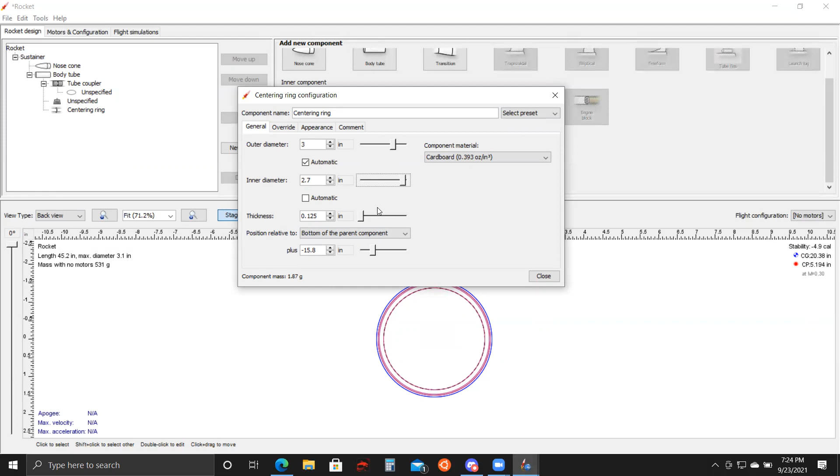So we have this 2.2. So we want it to be somewhere around 2.7. So you have this thin-ish ring, strong enough so that the legs can sit on there and stay there during flight. If you want to be a little safer, 2.6 to 2.7 is good. But you can have your legs sit on that really thin ring without it falling down during flight. This is crucial. If you do not have this, we will tell you, and you will have to change that. Because otherwise, as I said before, your lander is going to shoot straight down the rocket and will become unstable in a heartbeat.

One thing I do want to point out, make sure that you have enough space down here for the lander to fit. My lander team miscalculated this, and this centering ring was way too high up, and we ended up having to basically cut the legs off of our lander. So it's more like a capsule than a lander. So just make sure that you really carefully consider this part.

Another method you could do, if you want to make it simpler, you can make a bulkhead and drill a bunch of holes, just using one of the drills at the TI lab, so that the gases can push through. That's what my team did. It worked. But this is really easy if you do the thin centering ring, because you could just make the CAD model in SolidWorks that we show you next week and just have it laser cut for you without any more effort. So I think that is mostly it for payloads.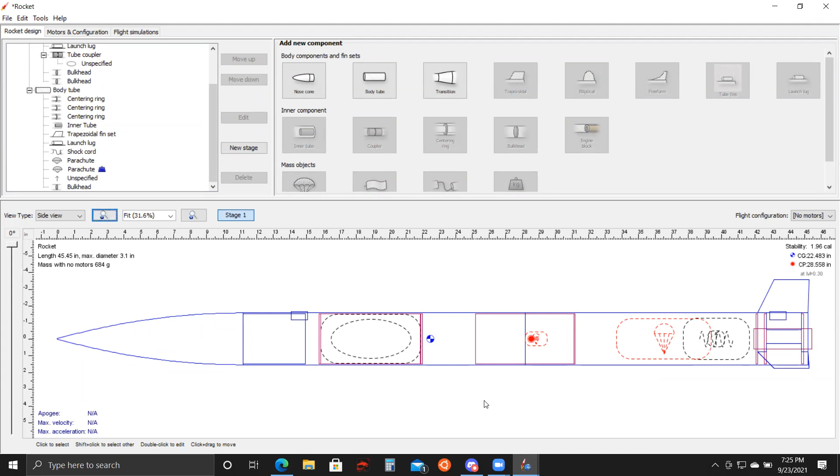Yes, this is it for payloads. And I explained the lander challenge too. Does everything make sense, guys? I know that I just did sort of a huge part of the crash course. Yeah, if there's no questions, I trust that you guys understand. Oh, chat just went off. Yep, cool. All righty, that's confirmation that I could move on.

So now we go for motor configuration. I'm going to close this out. I hope nobody is sentimental towards this rocket because we don't need it anymore. Anyways, we have a motor tube down here, but there's no motor inside. So we need to put a motor in there. Otherwise, our rocket is going to be a bunch of cardboard, plywood, some cord, and parachutes and electronics. But not really a rocket. It's just going to sit and do nothing. The motor is where the fun comes in.

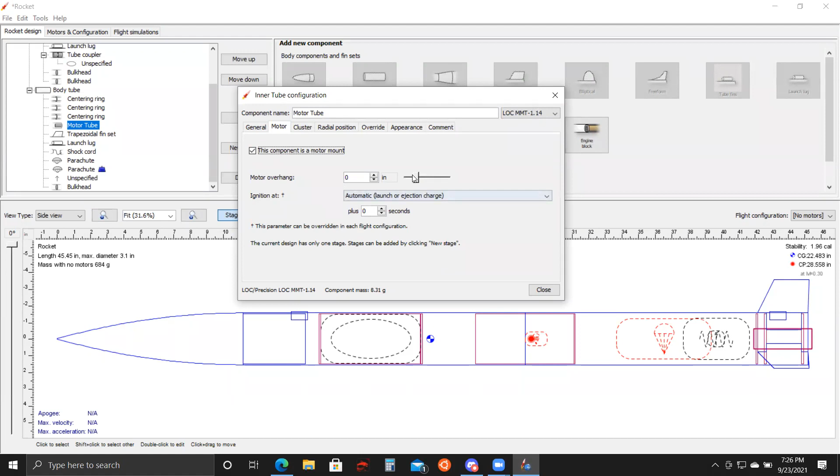And so you're going to want to go ahead, hit the motor tube, inner tube. Actually, I can rename this up here to motor tube, just to make it a little more clear. And you're going to want to go to motor. And this component is a motor mount. Click. Oh, there's motor overhang here. My bad. This could also be another way to include a little bit of motor overhang. But if you do the tube like this, you'll be okay. Anyways, marking this as a motor mount will allow you to put a motor inside of the motor tube.

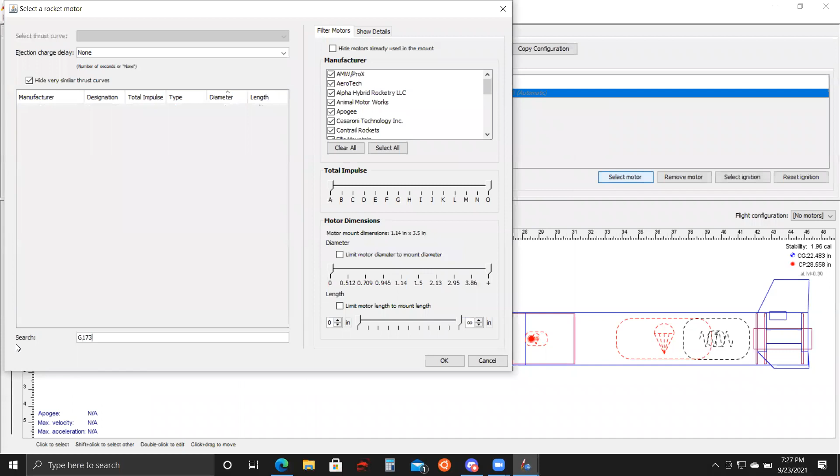So after you click that, you close it and go to motors and configuration. You're going to notice motor tube is something that you can do. So you're going to want to do new configuration. You can see there's no motors. You're going to select a motor. And you can see this huge selection again. You're going to want to look for a G173. Let me see what the slide says. G74. Oh, I'm in the high power category. I'm sorry, guys. G74, Aerotech. Yeah, I think that's the one. Change the ejection charge delay to 9. Oh, you're right. Ejection charge delay. Ooh, what the heck? I cannot see anything.

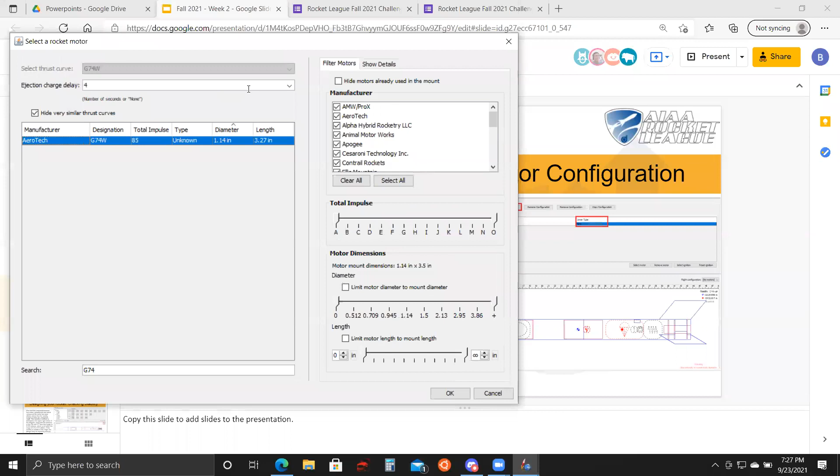Where's the ejection charge part? How did I forget? Oopsie. Oh, thank you. 9 seconds. So that is the ejection charge delay to 9. And I think that's it. I think we're okay. You select this, you press OK, and look, you see this little filling now? Suddenly, the motor is now in the motor tube.

Congratulations, guys. You'll notice that my stability tanked because we have this giant mass component at the bottom of the rocket. But now you have your G74W-9 in the rocket. Checking stability, I'll talk about this. We like it to be between 2.0 and 2.5. If it's more than 2.5, you can say reduce the size of your fins, take off some mass, make your rocket a little more efficient.

But my rocket right now, stability 1.18. Pretty bad, not gonna lie. So last week I talked about how to fix this. One of the ways, change your fins, make them a little bit bigger. So let's say I change the height to, ooh, look at that. If I change the height a little bit more, increase the root chord a bit, oops, the fin tabs automatically calculate. Yeah, there we go. It actually worked this time.

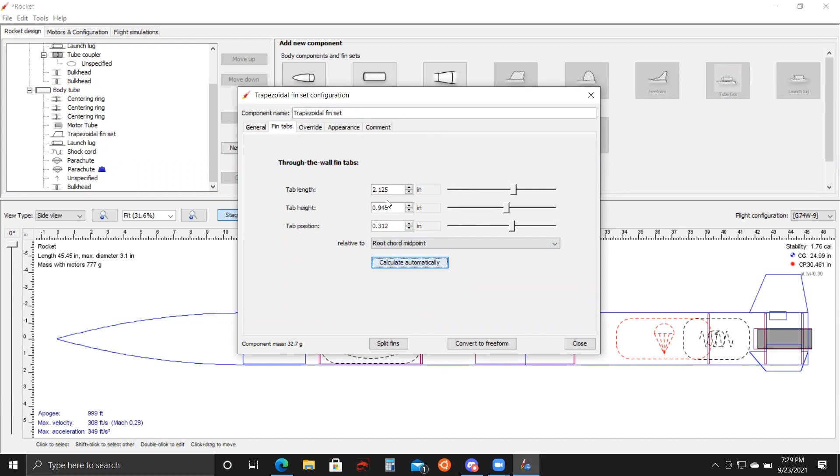The fin tabs actually calculated correctly this time, guys. So I guess, oh no, it didn't calculate correctly, my bad. Hold on, I'm actually curious if I can make it work right. Go fin tabs. I think it worked. Yeah, no, the height is not 1, it's 0.945. Cool. As we've said earlier, Open Rocket is kind of weird sometimes how it likes to function, but you can kind of wrestle with it a little bit and make it work.

But anyways, as you guys can see, I've been increasing the total area of my fins, increase the tip chord a little bit. Let's see how sweep length does. See, look at that. Now these fins look a lot cooler. So you can see that by making my fins bigger, my stability increases because I'm pulling my center of pressure down, and that'll increase the distance between center of gravity and center of pressure. Also, you'll notice I have, oh, what's up?

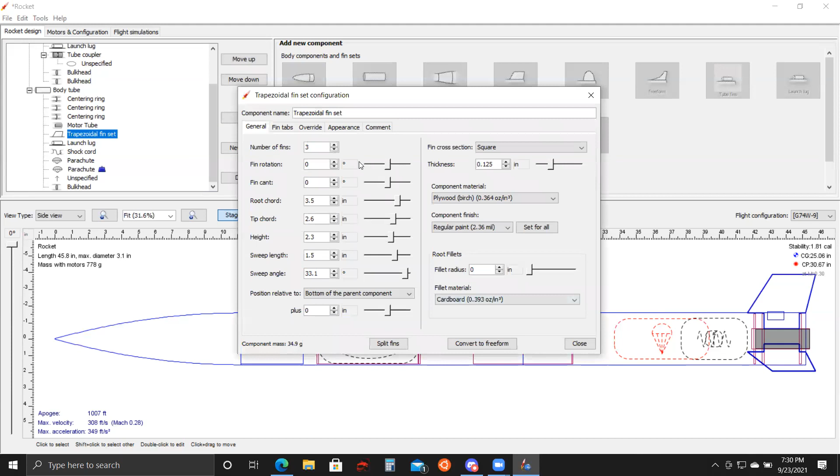Yeah, another way to increase stability is adding more fins. Oh yeah, that's right. I only have 3. So if I go from 3 to 4, 2.46. Look at that. So yeah, adding the extra fin can really greatly increase the stability of a rocket. But I'll leave it at 3 for now because I want to show how to add mass to the nose to increase stability in a second.

I want to emphasize apogee. What I was talking about earlier, look, we can actually see the predicted apogee of my rocket here that I've been designing. It's 1,007 feet. So as you play around with your rocket, change the mass up here and do all this stuff, you'll see your apogee starting to change. So now my stability with my current rocket is 1.81, still a little bit bad. Here's the second way that you can improve it.

If you go to your nose cone, actually click nose cone, you can put a mass component right here. Put it kind of here, and you can sort of play around. If I increase the mass, the stability is increasing. But you'll also notice that my apogee decreases. Of course, if you add more mass to your rocket, it's not going to fly as high. But that's not necessarily a bad thing, because if we set the altitude to 900 or 950 feet, you can increase your stability and kind of pull your apogee down to match our specifications.

Mike, I'm going to mute you.

Alrighty, cool. So that is the second way that you can stabilize your rocket. And when you're doing this in real life, I'll explain this again in building, but basically you're going to put copper BBs or fishing weights on the top and then use epoxy to secure it on the nose cone. I'll give you more details about how to do that, for sure. But this is a very practical and not that hard way to increase the stability of your rocket.

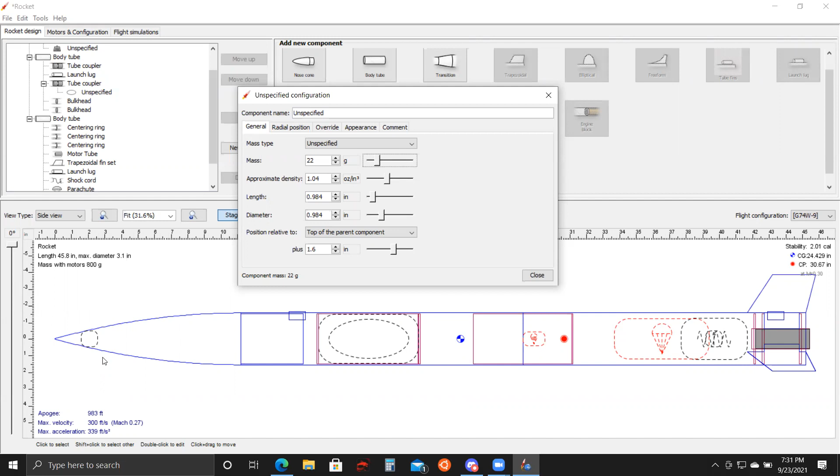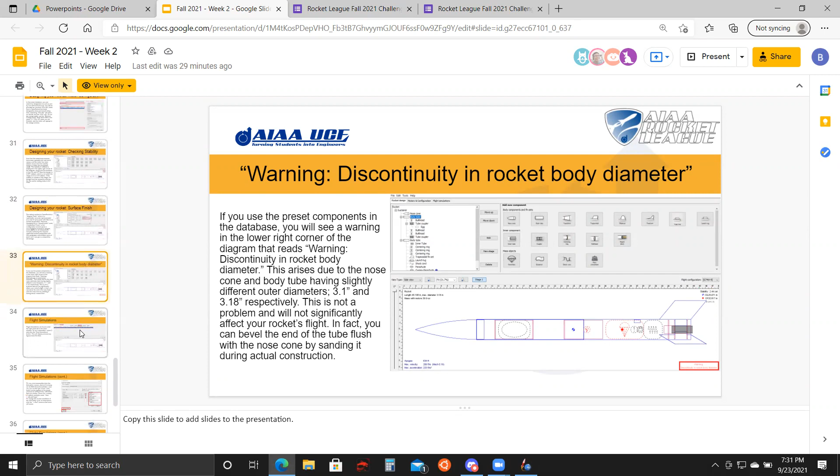Okay. So if there are no questions for stability, surface finish, don't worry about warning discontinuity. It shouldn't be so bad. Flight simulations. Okay, flight simulations is something that's really, really nice. So what does it do? If you look at this top here, flight simulations.

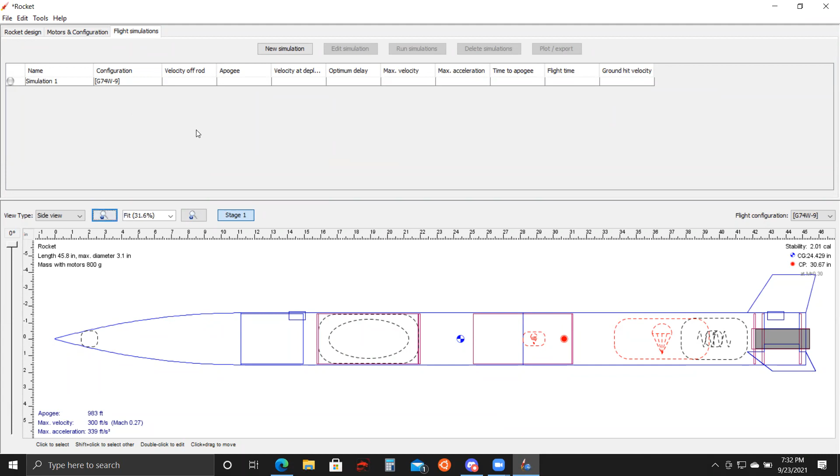The way that your simulations work is you can actually go ahead and kind of see how your rocket would perform if you were to fly in real life. So how do we do that? Well, on flight simulations, we have our configuration here. Hit new simulation. So it's, okay, new simulation 2, just testing. So you're gonna have a bunch of little parameters.

And I think there's some things that you can change. You don't really need to change these, like wind direction 90, average wind speed. You can basically change this like a best and worst case scenarios. Like let's say it were 10 miles per hour here, something like that. There's a lot of little details that you don't really need. Simulation options, I don't think you need that.

What's next? I forget. I think you hit OK. Oh no, I'm doing this wrong. I want to see how we get to here. Oh, this bothers me. Oh no, I think we simulate and plot. Yes, we do. Okay, sorry.

So simulate and plot, after you're done actually making the simulation, then you can see a bunch of little parameters here. So what are you going to want to add? Let's see here. Motor ignition, motor burnout, apogee, recovery device deployment, and ground hit. I think we should have just about everything. Yeah. We want altitude, velocity, and vertical acceleration. I really think that is all.

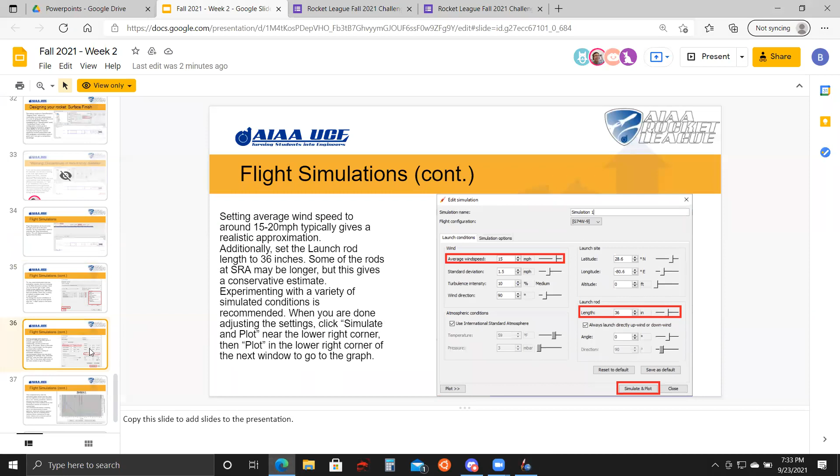Oh, average wind speed. Oh, actually, I forgot that stuff. My bad. Average wind speed up to 15. The length of the rod is 36 as shown. You know, all these little details, very easy to find. Oh, I know why these two are flipped around. That's okay though. Okay, so after setting this up, simulate and plot. Ooh, yeah, there you go.

All this is correct. So x-axis is time. That is correct. Cool. Let's plot this. Yes. So you hit plot and look at that. This is a graph. So this graph here kind of shows what your launch looks like. So you can see here altitude, vertical velocity, and vertical acceleration. So let's look at this graph in greater detail. I think if I do this, yeah.

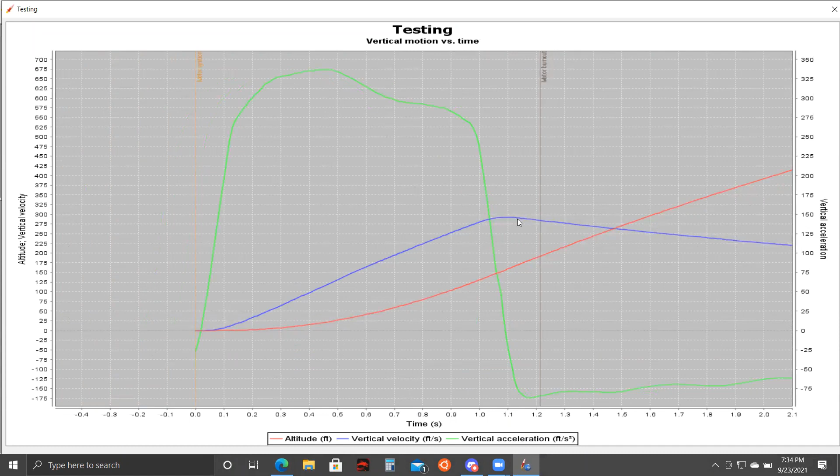So what's going on? Well, here's the launch. You can see the acceleration just shoot right up as the motor is going off. And then, uh-oh, I'm stuck here. Oh, okay, this is fine. Cool. So you have your vertical acceleration just shoot right up as the motor is going off. And then once the motor starts to burn out, it's going to dip right down to the negatives. Because, of course, once you lose your motor, you're going to be accelerating downwards because of gravity, yeah?

You'll notice the velocity goes up, and then it slowly comes down. And you'll notice the apogee. And at apogee, your dual deployment is going to go off. And you can see that it's going to kind of drift down like this. And then at this point, the actual parachute is going to go off. And so you'll notice how the slope goes down. That's because the rocket takes a little bit longer to drift down like this.

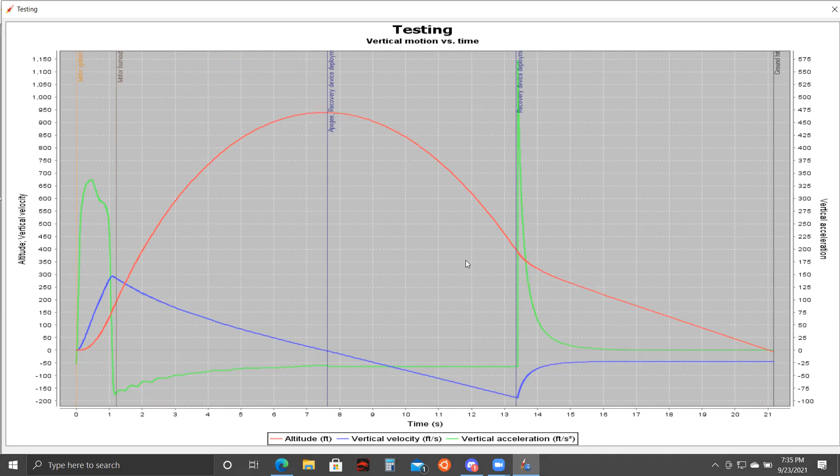So these graphs are really fun to look at. They can give you some insights as to how your rocket is doing. And then you can see that this is ground hit. So that's really the gist behind the simulations part. And you know, you can do all sorts of things. You can do as many simulations as you want. And then we hit close, and hey, look, it's green because it worked.

Yeah, so that's how you use simulations, and feel free to do as many as you want and get an idea for how your rocket performs. And yeah, there you go. All right, you guys. I know it's a lot. Open Rocket can be very confusing at the start, but once you get the hang of it, it is such an easy program to use compared to, you know, anything else in the world, I feel.

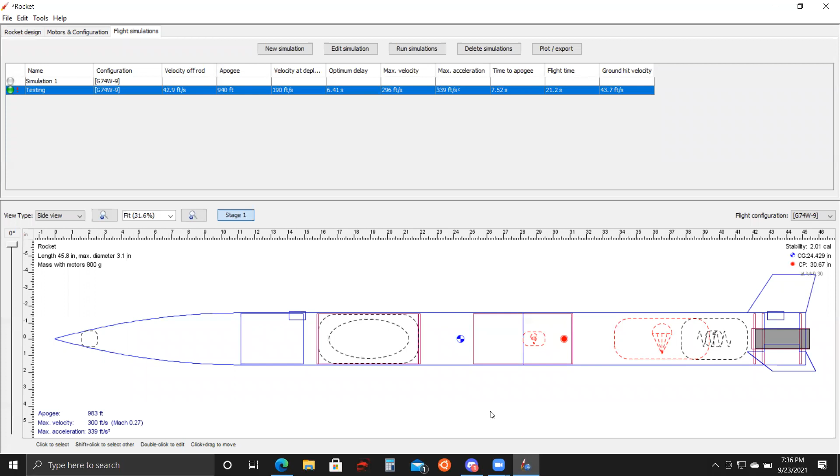This is a reliable way to make your rockets for even your L1 certification. I use this program for L1 and I got it. So there's definitely something to that. Are there any closing questions? Since I've basically made a rocket, I've designed the rocket.

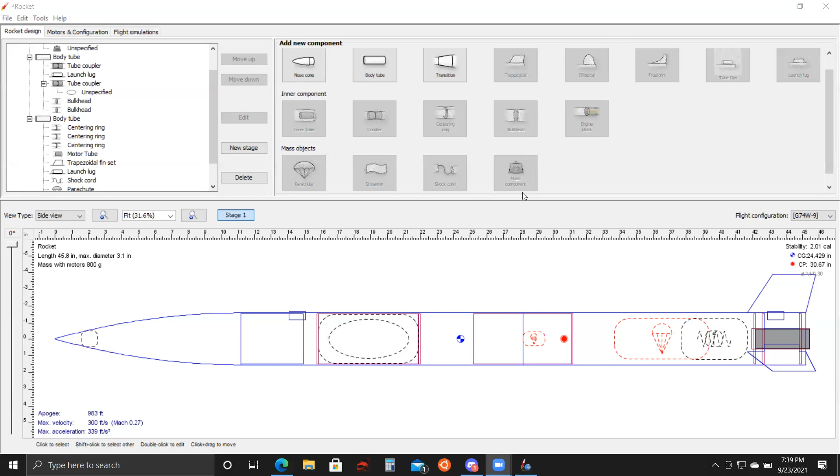All righty, I'll give one more chance. Any more questions about anything for Rocket League? And of course, guys, if you don't ask it now and you need help, don't worry. You'll be able to ask any of us on Discord, any of the officers, and we'll help you out.